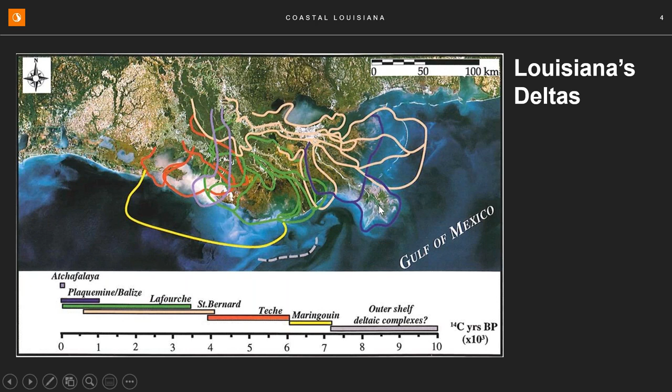So our coastal landscape continues to compact and sink, and with no new sediment deposits on the surface, a lot of our coastal landscape has actually converted to open water. Remember this map—here's the mouth of the river, this is the Mississippi River, and this is the city of New Orleans. Remember this image for the rest of the talk.

When I said the Mississippi River no longer overflows, we kind of ended that after the flood of 1927. So what's really happened is that over the past 90 years, we've had continued compaction of the marsh sediments, with no new addition of sediments on top of that. So what you see here is this devastating land loss we've experienced. Over the last 90 years, we've lost about 1 million acres of contiguous wetlands converted to open water. This ecosystem collapse, I believe, is probably unmatched anywhere in the world.

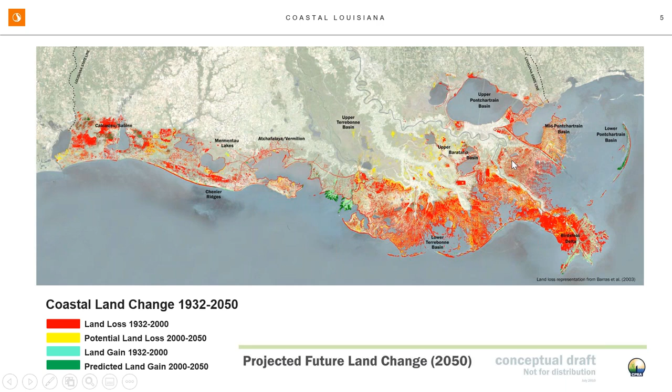And it threatens our communities and the way we live in coastal Louisiana, because you think about how important all that land is if you have a hurricane surge, okay? For the city of New Orleans, we historically had 30 miles of contiguous wetlands between the city of New Orleans and the open Gulf. Just remember this image as we go through our talk here.

Okay, so along comes Hurricane Katrina. But let me back up a little bit—I mentioned before that I'm a native of coastal Louisiana, and being a native and being an old guy, I lived through Hurricane Betsy in September of 1965. I was 11 years old at the time. And I had always heard in my life that I had already lived through the storm of a lifetime, okay? So I got to tell you, my mindset after that was that I've already lived through the greatest storm I'm going to see in my lifetime.

I offer that because Hurricane Katrina changed everything. Where we thought we only had one of these storms in a lifetime, then along comes Hurricane Katrina, nearly 40 years to the day from Hurricane Betsy. With Hurricane Katrina, we had nearly 2,000 people killed, and nearly $81 billion worth of damages. But you look back on Hurricane Betsy—a similar sized storm with a similar path—and we didn't have nearly the destruction. We didn't have nearly as many deaths or nearly as great a losses as we had in Hurricane Katrina.

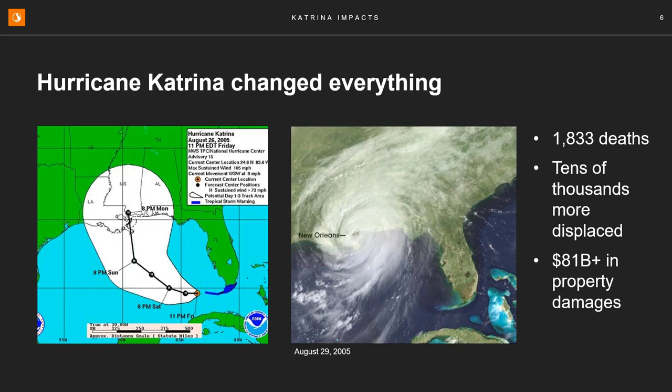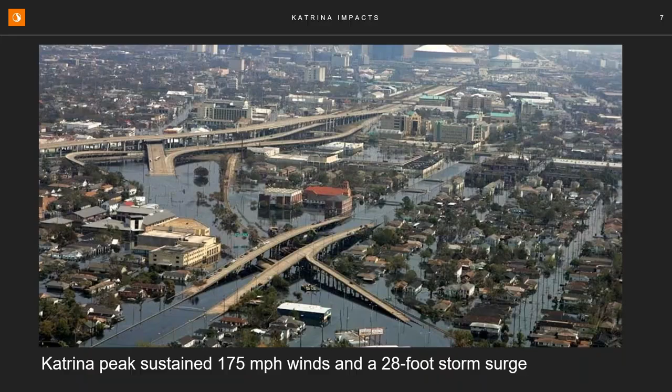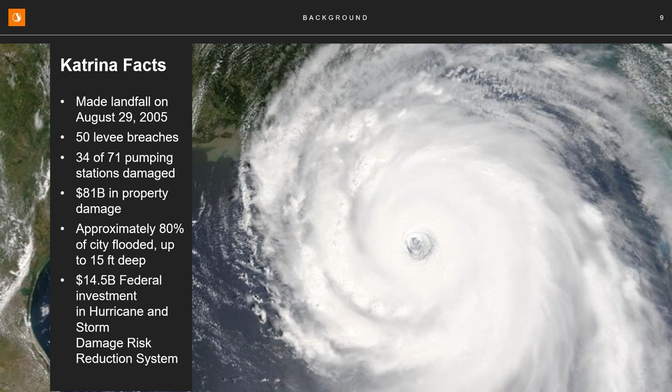Again, these are some facts about Katrina. Recognize that this was truly a storm we've never seen before. The path of the storm is such that the wind blows counterclockwise. So as it's coming on shore, it's blowing water from the Gulf into Lake Pontchartrain. Then when the eye passes, the direction of the winds is no longer from the south or the east, it's from the north, and it takes all that water and pushes it back on the city of New Orleans. That's what caused the overtopping of the existing outfall canals in New Orleans, and that resulted in about 80% of the city being flooded. The 20% of the city that did not flood was the old city, the area settled closest to the river and the highest elevations.

So you look at this, and this is my slide that says 'this could never happen' sort of thing, right? We have Hurricane Katrina come up through the city of New Orleans and coastal Mississippi, and it takes out the entire east side of the state of Louisiana. But then, lo and behold, 3 weeks later, we have a very similar storm come up, go through Lake Charles, Louisiana, and Galveston up through Houston, and take out the western side of the state of Louisiana. But that obviously had never happened before, and it could never happen again, right? Well, almost 3 years to the day, we had Hurricane Gustav come ashore and take out the eastern side of the state. And 2 weeks later, we had Hurricane Ike take out the western side of the state, Galveston and Houston. So I just offer that to say, if you think it can't happen because it's never happened before, believe me, it can, and probably it will.

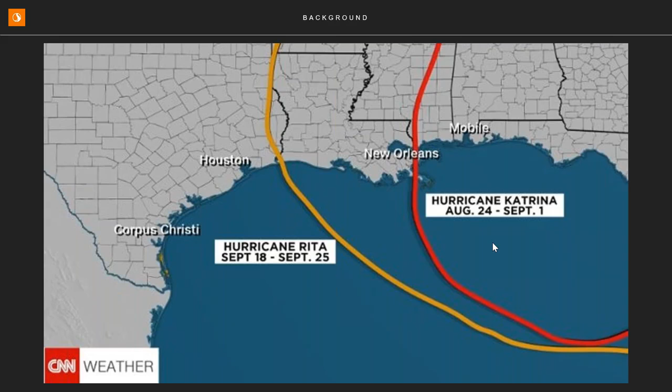Think about this: this was just our hurricane season last year. We had 8 named storms where coastal Louisiana at one point was in that cone of uncertainty. Out of those, probably our most devastating storm was Laura, that did cause a good bit of damage in coastal Louisiana.

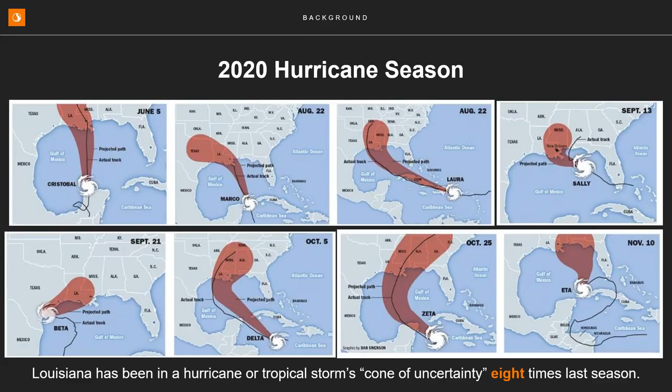So now we'll jump and talk a little bit about how the federal government responded post-Hurricane Katrina. We're very fortunate in that because for the emergency response, the Corps of Engineers was given a pot of money, about $15 billion, and they moved forward very quickly with upgrading our existing, at that time, hurricane protection system. But after this, we realized that you really can't protect a city from any size storm, so they changed the name and now call these the storm damage risk reduction systems. But the Corps was very fortunate, we were very fortunate, they had money.

They came in. What we had in the storm was the hurricane surge really overtopped the levee, and we had 50 different levee breaches. We had 34 of the city's 71 pump stations damaged. We had 169 miles of levees and flood walls that were compromised. And during the storm, we also had 14 inches of rainfall within a 24-hour period. So the Corps' system that we've got in New Orleans now is really a greatly improved system that strengthened the levees, the flood walls, gated structures, and pump stations.

We also had several technically advanced engineering solutions implemented in this project. The first one, up here to the north, to the east, is the IHNC Lake Borgne surge barrier, created to stop the surge coming from the east. It provided great protection for the eastern portions of Orleans Parish and St. Bernard Parish. It was basically nearly a 2-mile barrier, the largest of its type in the world. It has 3 gated structures, and the top elevation of that barrier wall is plus 26 feet.

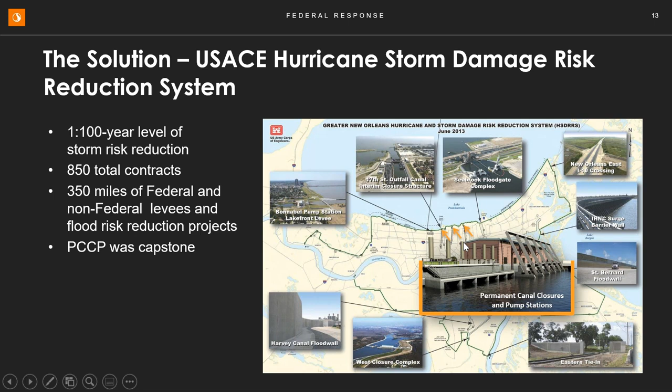Really, what I want to talk about is what happened in this area right here. And this is the project I'll talk a little bit about.

It's a permanent canal closures and pumps project, and I'll show you this map just to kind of see. The pump stations are up here on the levee, but our major internal drainage stations, pumping stations, are down in this area.

The reason that is because historically, when these pump stations were built at the turn of the century, and I don't mean 2000, I mean 1900, that was the edge of the city.

And so you had the pump stations, you had the internal drainage system, collects all the water, and then it would just pump it into the swamps that historically existed between the city, which would have been down in here, and Lake Pontchartrain.

Well, over the past 120 years, we've grown out past, we developed out past those original pump stations all the way to the lake.

And the way we responded was not by moving the pump stations to the lake, which was recommended actually by the Corps probably 40 years ago, but we built these long outfall canals.

And these long outfall canals really what caused the problem, because you have pump stations inland, and then you have the large pump stations, and then they're open to Lake Pontchartrain.

Hurricane surge pushes water down to overtop the flood walls, and that's what fills the city. That's what fills the city with water.

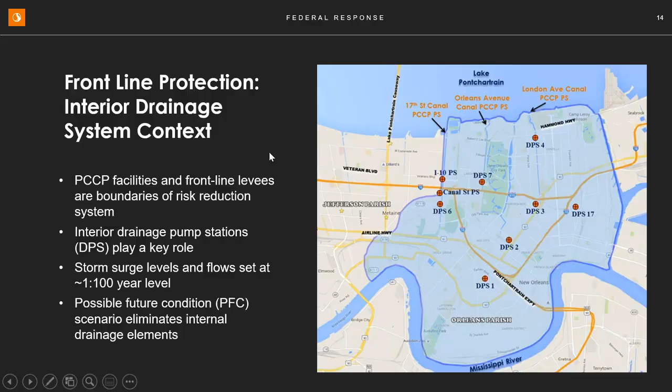So these pump stations, they have a typical layout where we've got the bypass gates over here, and those remain open all the time, because you have to realize that under normal conditions, non-storm events, these stations are not functional.

Okay, so we operate the way we always did. We have these long outfall canals, the internal pump stations, which are vintage 1900 pump stations, pump water into those canals, and by gravity it flows to the lake.

During storm events, you have to close those bypass gates and operate the pump stations. And because you expect that you're going to lose power during these storm events, you have to have your own generator building to provide that alternate source of power.

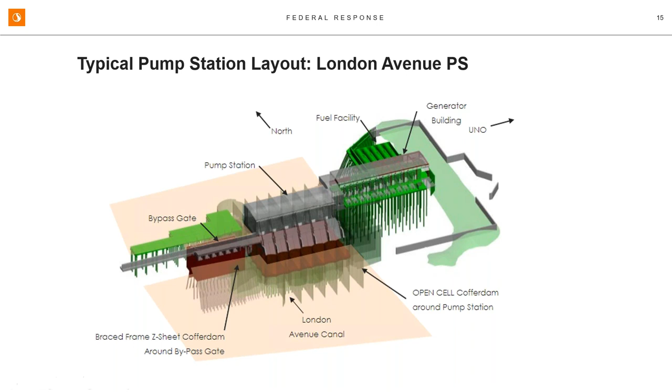So we'll look real quickly, and we will look at all three of these pump stations. I'm going to show it to you real quickly, but realize that for all three of these pump stations, they...

They have similar equipment, similar pumps, so that when it comes time for maintenance of these pumps, it's not like each pump station has unique parts that have to be worked on or whatever.

So the pump station to the east, the farthest one to the east, is London Avenue. It has a total capacity of about 9,000 cubic feet per second, which is a pretty good sized pump station.

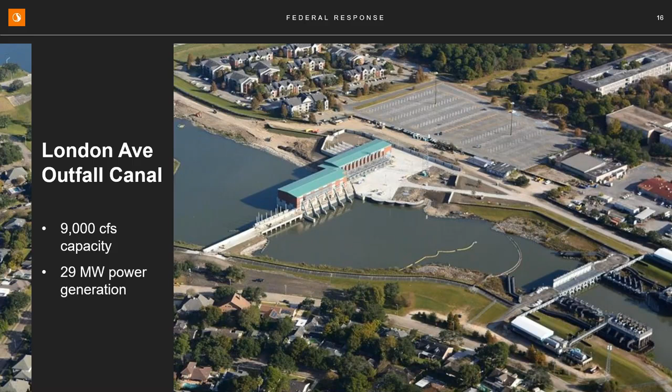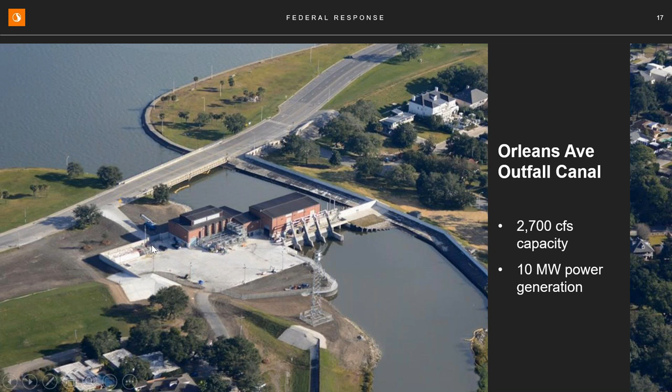The one in the middle is Orleans, and Orleans is the smallest. It has a capacity of about 2,700 cubic feet per second. It has 4 of the large generators and 3 of the large pumps.

And then the really large pump station is the one on the western side, the 17th Street Canal. The total pumping capacity of that plant is 12,600 cubic feet per second.

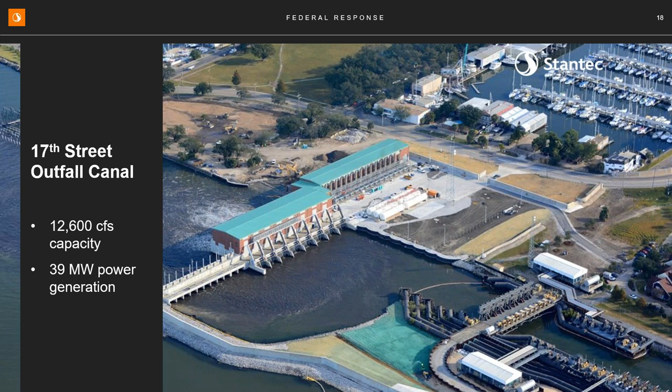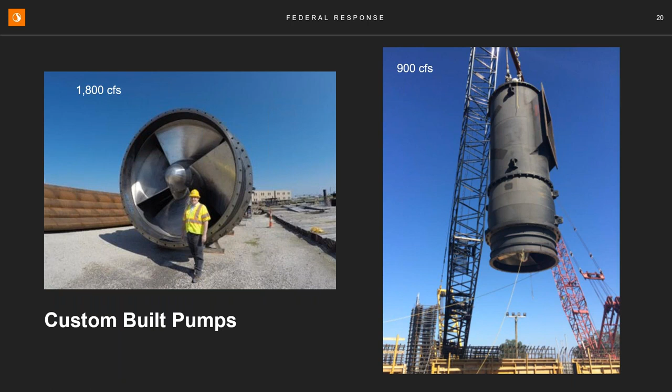This is the size of the vertical pumps. They're very large pumps. Look at the size of the impeller here. This guy is John Take, and John is probably about 6'1", so that just kind of gives you an inkling on how large this equipment really is.

So this whole project took only about 4 years from beginning to end, that is from the time you started to design, to construction being complete on all 3 of these pump stations, for a total cost of about $731 million. So the federal government's in there, building all the hard structures that surround New Orleans.

So what is the state doing to help with this issue? Well, for the past 40 years, the state of Louisiana has known that we've had a land loss problem on a global scale, and we had begun to take action. We were taking action, but they were kind of small projects. After Katrina, we really got serious about looking at the state and coming up with a comprehensive plan.

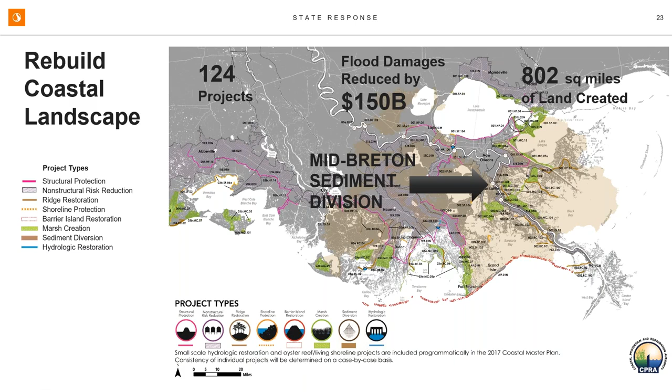So look at that. If you look at the specific location here, the project is going to be located right here, and it's located here because of 2 things. One, you've got ample sediment in the river here. This is on an accreting point bar, so you would be assured of having a continuous, sustainable source of sediment to feed into the diversion. Also, it has the shortest distance to cross the federal levee and the local flood protection levee to reach the deteriorating wetlands.

And also, if you look here, you can see the city of New Orleans in the background. So the whole idea is to rebuild this marsh area to provide protection to the city of New Orleans.

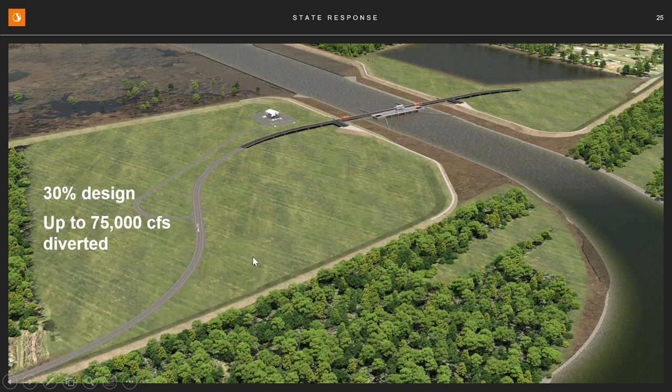This is a graphic of what the structure will look like. The structure is going to be 75,000 CFS and will be operated when the river flows about 1 million cubic feet per second.

To give you some idea what that is, 1 million cubic feet per second, that's the beginning of flood stage on the Mississippi River. The average discharge for the Mississippi River is about 600,000 CFS. But if you look at the 10 largest rivers in the United States, the Missouri River is number 10, at about 86,000 CFS. So this structure will be the same size as St. Mary's River in southeast Georgia, which is the 11th largest river in the United States.

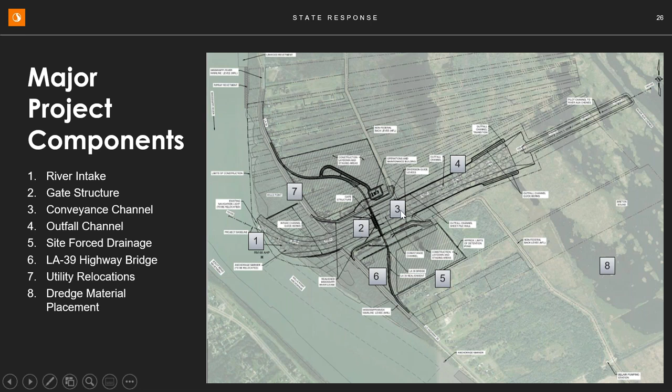So again, think about this, this is a very, very large structure. The main components we will have here would be the river intake, the gated structure, the conveyance channel, and then the outfall channel associated.

The gates are currently being designed. The gate structure would consist of 5 vertical lift gates, each 48 feet wide with a base elevation of about -25. And then this is the receiving area that we talked about.

This is really important because this project is critical for near-term restoration, and it's expected to reestablish the natural deltaic process, reestablish critical habitat, and really improve our coastal risk reduction. The project is estimated to create or restore 50,000 acres over a 50-year period.

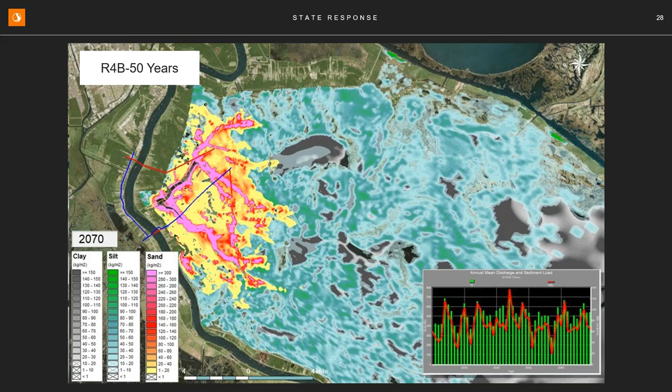Okay, and then lastly, we'll talk about how the city of New Orleans responded to Hurricane Katrina. And I think this is one of the most really exciting stories for me to tell as a resident of Louisiana. Recognize that before the storm, we had a lot of challenges, and those challenges might be similar to your communities or where you're from.

So if you are, you probably can relate to this. We have the physical stressors. We have really high intensity storms. We have climate change. We have sea level rise. We have extreme heat in the city, and we have over 55 inches of rainfall a year. And then, because of our soil types, these heavy clays, we have this shrink-swell soil, so we have a lot of subsidence and aging infrastructure, and that causes damage.

To our aging infrastructure. And then too, we had the social stressors. New Orleans is a place where we have high levels of poverty, unemployment, violence. We're always at health risk. I mean, everything we do in New Orleans, we drink too much, we smoke too much, we eat everything we have, we deep fry, we don't get a lot of exercise. So we've got all of these things that we have to accommodate, and we also live in this bowl, remember?

So what I'm going to say is that the lowest elevation portions of the city are usually the least expensive land. So what happens is some of our low and mid income neighborhoods just happen to be located in these lower elevation parts of the city. So that whenever you have this flooding event, you have some cases where it's as much as 15 feet of flooding.

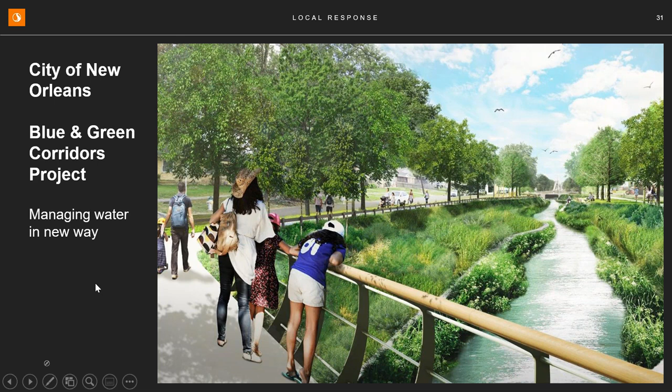And I say that just because before the storm, we wanted to pump water out as quickly as possible. And then after the storm, we realized that we can't accomplish that. So we have to think about water in a different way, and how do we manage water? And the Blue-Green projects were really the start of that. Okay, how do we do that?

So the existing conditions, like I said before, you look at New Orleans, you look at the lower elevation portions of the city, we have all kinds of issues. We have everything from the infrastructure. We have entire neighborhoods that are serviced by one pump station that has to rely on one pump station to drain a neighborhood. We have all these problems with subsidence and how you operate the pump stations. If you pump the water too low, then you have so much compaction, it causes all problems with your other infrastructure, whether it be wastewater or water infrastructure.

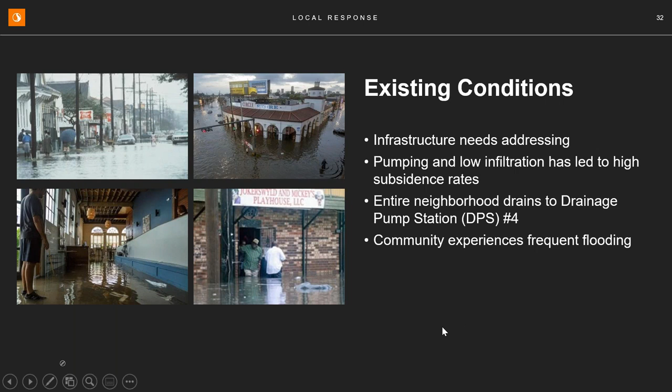And then our communities, to be perfectly honest, with this increased frequency of storms and intensity of storms, people got really, and they still are really, really tired of this repetitive flooding. So part of our project, the very beginning of our project, had to do with a lot of engaging people about this new approach, this living with water approach. And this required a lot of focused community engagement, so that people really understood the benefits of not just flood mitigation, but all the amenities that could come along with this to improve your community and improve your quality of life.

And to find out what people really wanted, we didn't just schedule project meetings and have people come, but we actually reached out and went to neighborhood events and festivals and meetings, and even in some cases went to people's homes to sit down and talk about what could happen. And this more engaging approach is something that is really required by any HUD funding which paid for this project. And we went out to the public and really tried to finalize our plans by talking with people one-on-one.

Most of the people in Gentilly today recognize that we can't just pump all the water out. So when they came to our meetings and understood what was possible, they came with very specific ideas about how to make their neighborhoods more resilient, more beautiful, and more livable. I got to tell you, that's something that as a citizen, your heart is just warmed by, that people can really come up with not just how do you get the water out of my neighborhood, but how do you make my neighborhood a better place.

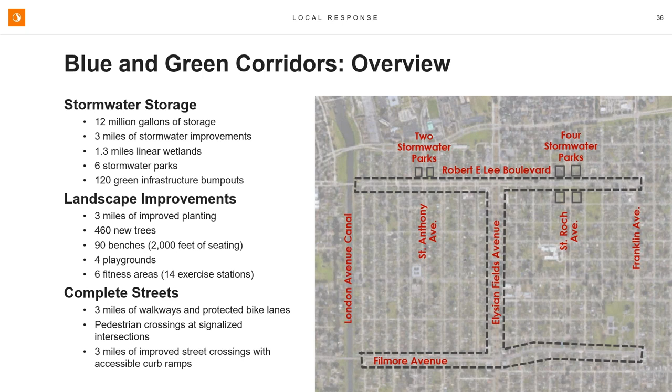So let's talk a little bit about this main concept, and that is water storage. If you come to New Orleans and talk to locals, we refer to the broad grassy area in the middle of an avenue or boulevard as the neutral ground, because historically in New Orleans, our ethnic neighborhoods in uptown New Orleans would come together and trade there, like folks from the Italian neighborhood would never just go into the German neighborhood.

They had to have this neutral area that you could come to and visit and trade, and that was called the neutral ground. In our case, the neutral ground was always built up higher than the street level, so when it rained, the rain hit the nice grassy area and ran off into the street, and you had to worry about that water going into the drainage system.

Well, one thing the Dutch thought is they came and said, you get this all backwards. You need to turn that upside down, and take those neutral grounds and make them depressed, lower elevation areas, so that during storm events they serve as a water storage area, where water can be collected and then slowly released to your drainage system, which is what we've done here.

You can kind of see what it looks like during a rain event and a dry event. This is an engineered design. What does it look like? You have permanent water held in the canal, you have capacity for the floodwaters, and then you're able to couple this whole design. This is a way of optimizing the operation of your pump station, but how do you make it better for the whole neighborhood?

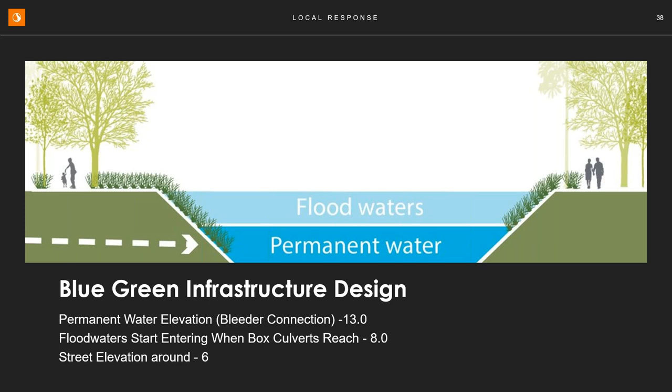You can incorporate amenities like walking paths and bike paths, landscaping, and lighting. Then finally, this complete streets concept was something really embraced by the neighborhood. People wanted to make crossing the streets safer for pedestrians with bump outs, which cause slower traffic.

They like the connectivity between the neighborhoods for bike riders too. So listening to what their needs were really enhanced these streetscapes, with the addition of rain gardens to store water, bump outs, and enhanced signage and markings. So this is going to be a very highly visible improvement to the community.

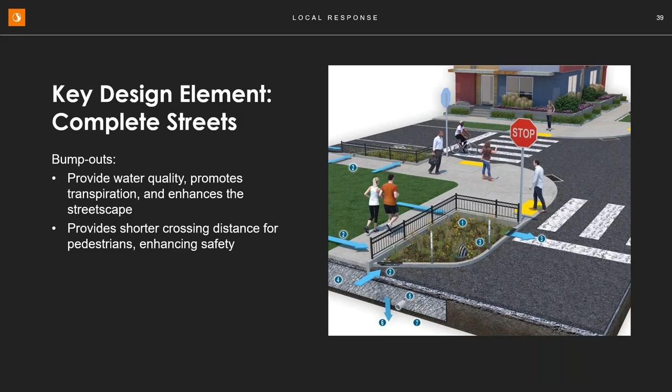We're almost at the end here. One last major thing with this project was that there was a major intersection, and the city owned the 4 large lots adjacent to that intersection. The idea was to take those 4 lots and, under non-storm events, build a lot of recreation amenities for the community to gather. Then when you do have a storm event, you have large areas again that can store water and slowly release it to the collection system.

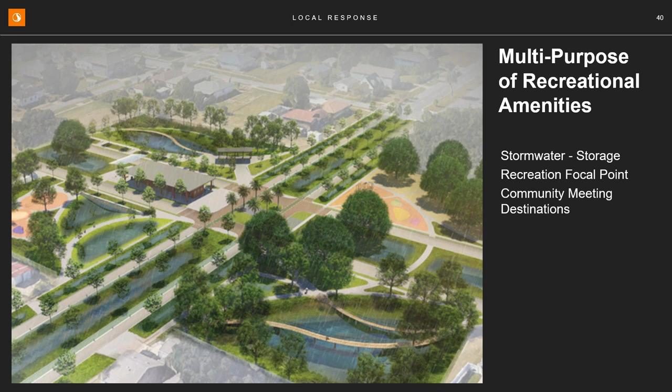This overall project is about 90% complete in the design phase, and we expect construction to start in the foreseeable future. Phase 3, which is the last one I just talked about, is probably about 60% complete. One good thing all communities can learn from this is that HUD funding allows this complete analysis of benefits, and we work with AutoCASE to calculate the environmental, social, and financial benefits of the project and compare them to overall project costs, including maintenance and everything else. The calculated BC ratio for this project was about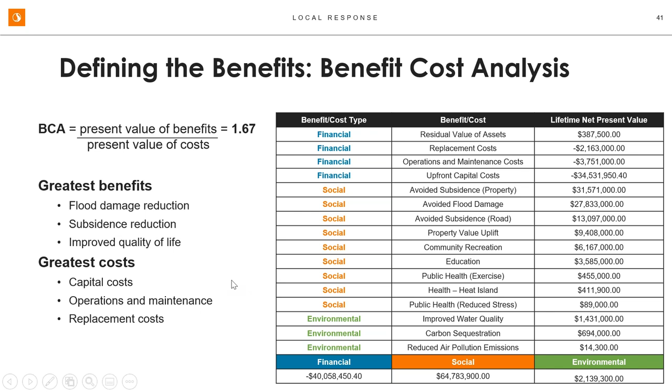1.67. So it's really important because HUD is going to have money that you can apply for, for your community to do these types of projects, and recognize that there are tremendous economic benefits for communities with this overall approach.

So realize, as you can see, resilience is not just one thing. It's really a layered approach that allows for the mix of both gray infrastructure and blue and green infrastructure to result in this more holistic solution.

That's one approach we really want to stress here, that all of our communities are different. We all have different social and environmental issues, but every community can identify their opportunities for the unique conditions that they're faced with.

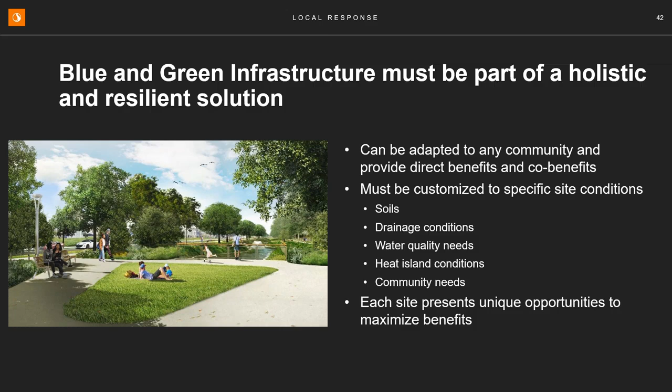In closing, I would just say that effective solutions really require all of us. Just a couple of things I hope you've gotten from this presentation: we all have multiple challenges, and we'll all embrace probably different solutions. But the combination of all of those projects really addresses this overall improved resiliency of our communities.

You need to operate from the mindset that it could happen to you, and it could happen at any time. This isn't just us; this is something happening around the country and around the world, and I think that's going to keep happening. The goal for your community should be to prepare before the disaster, don't wait until you've already suffered the loss of life and infrastructure damage that we did. And always remember that resilience is a layered approach.